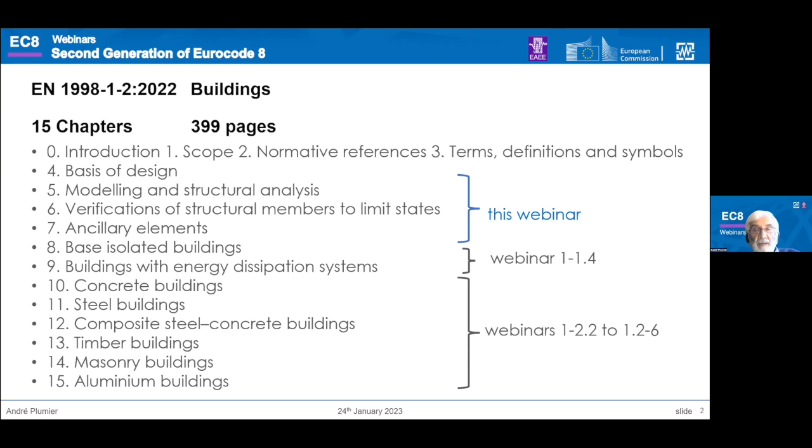Thank you, Mr. Chairman. My presentation is on the general parts of Eurocode 8, part 1.2, pointing out some new features present in chapters 4, 5, 6, 7 of this part. Part 1.2 has 15 chapters, a total of almost 400 pages, and the chapters on materials, 10 to 15, will be presented in the next webinars by the next presenters. This part also has 13 annexes, 7 normative and 6 informative, and most of these annexes are completely new or rewritten sections compared to the previous version of Eurocode 8.

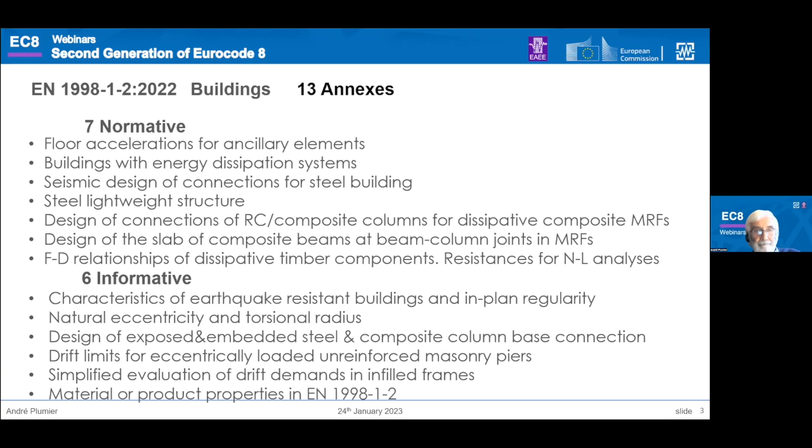In my presentation, the new features compared to Eurocode 8 of 2004 will be shown in blue color. This is a way to point out the new features, but I keep the usual data in black color, for the completeness of the presentation.

In the revised Eurocode 8, four limit states are envisaged: operational (OP), damage limitation (DL), significant damage (SD), and near collapse (NC). For buildings, the only mandatory verification is for the significant damage limit state. Of course, the national annex or the contract may ask for different things. For most structures, non-exceedance of the SD state avoids exceedance of near collapse under a more severe action, and damage limitation exceedance under a seismic action less severe than that of design.

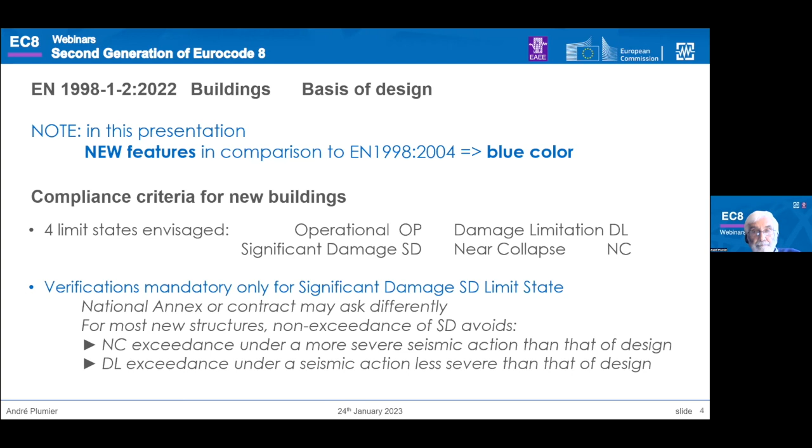In the revised Eurocode 8, there are, like in the previous one, three ductility classes: DC1, DC2, DC3, but their definition is partly different from the DCL, DCM, DCH of the current Eurocode. DC1 is very much the same as DCL, but the limits of application of DC1 are revised. I will explain that later.

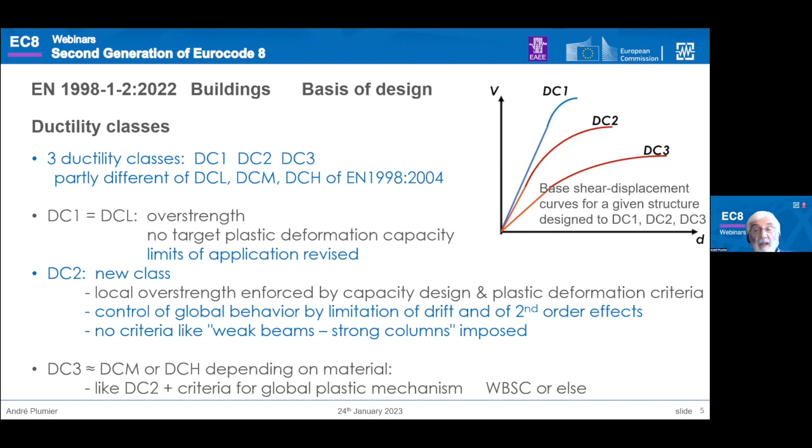DC2 is a new class in which local overstrength is enforced by capacity design and plastic deformation criteria, but the control of global behavior is by limitation of drift and second-order effects. There are thus in this DC2 no criteria like weak beam strong columns, which was imposed in DCM. DC3 is very much the same as former DCM or DCH, depending on the material. So it's like DC2 but with criteria for global plastic mechanism, like weak beam strong columns or else.

Regarding the reference seismic action, there was a complete explanation in webinar 1.1-2. But I mention that the reference seismic action is now the plateau of the spectrum, so the maximum 5% damped response spectral acceleration, the constant acceleration range. This is for a 475-year earthquake return period on site category A and consequence class CC2, defined in the table. So PGA, the former reference parameter, is S alpha 475 divided by FA, which is generally taken equal to 2.5.

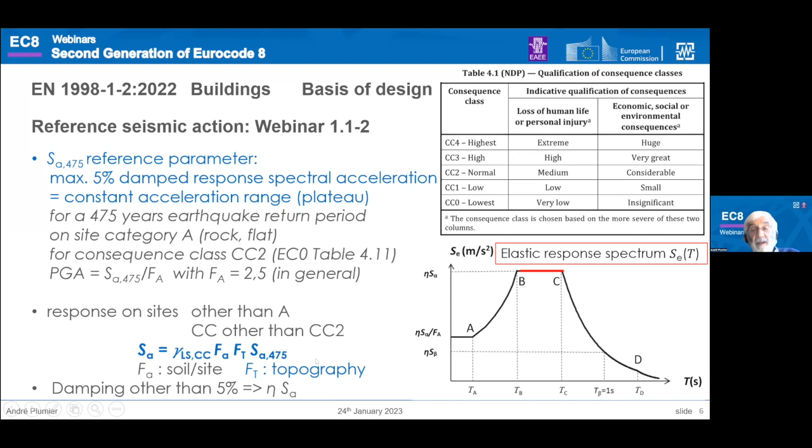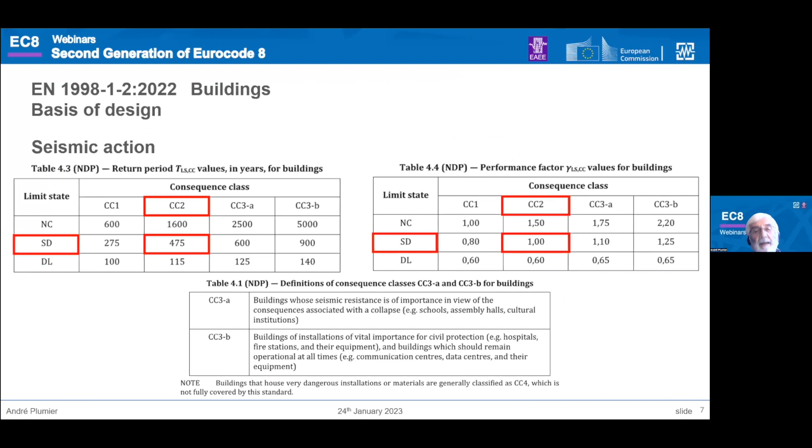Response on sites other than A, for consequence classes other than CC2, applies a complete formula in which you see factor FA for soil site, but also factor FT for topography, and the gamma limit state consequence class factor. For damping other than 5%, a factor eta is applied. These are data for your information; I will not speak about these tables, but this is just to make the slides complete for your use. A new parameter is also introduced, the seismic action index S delta, very much the same as the S alpha mentioned before.

S delta takes into account the influence of consequence class, and the other three factors, FA, FT, and S alpha, are as mentioned before. This S delta is used in many places in the code to define the seismic action class, so low, moderate, or high, and also to define limits of seismic action for given structural types per material and per ductility class.

There has been an evolution of this S delta from the current Eurocode of 2004 to the revised one. In 2004, in DCL, there was a recommended limit for all types of PGA of 1 meter per second square, corresponding to S delta equal to 2.5. But in the revised Eurocode 8, these limits are mandatory values of S delta. For instance, for non-ductile types, the value of 2.5 meter per second square is kept, but for other types it's significantly increased, up to 5 meter per second square for walls and metal structures.

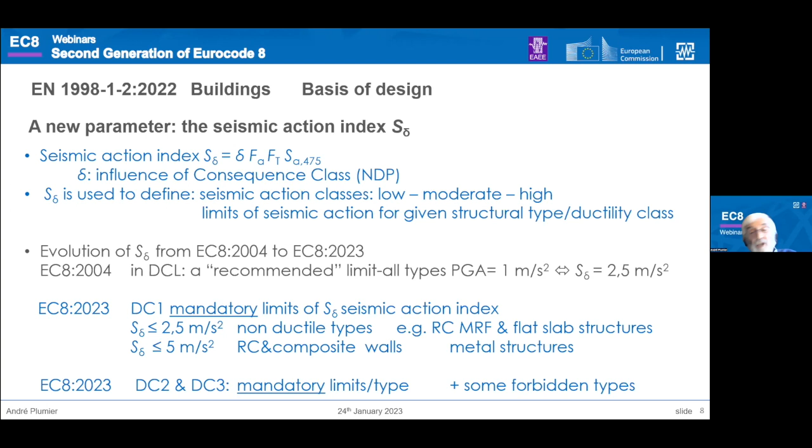In DC3 and DC2, there are mandatory limits which are given by chapter, as will be explained later.

In conceptual design, the classifications of structural types are extended in all chapters by materials, and besides the basic types, there is more distinction between different dual types and their relative contributions. There are new types like flat slabbed or steel lightweight, and also general clauses about hybrid structures in which two or more structural types and/or materials are present in the same resisting plane.

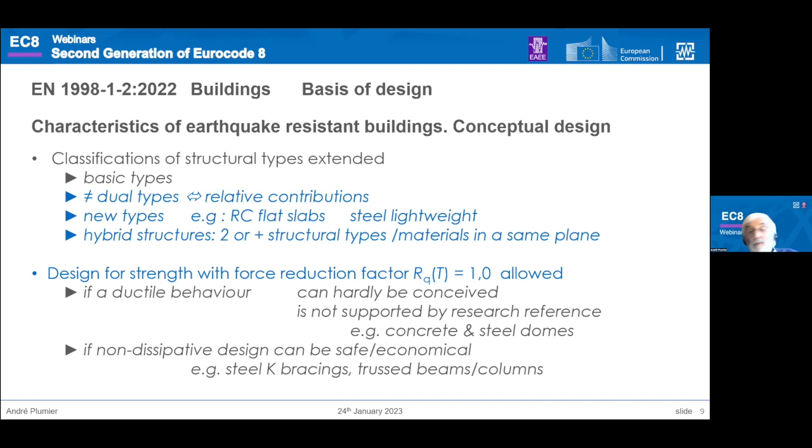Also, an important step forward is that the design for strength with force reduction factor, now named RQ of T, equal to 1, the so-called Q equal 1 clause, is allowed in particular if a ductile behavior can hardly be conceived for certain structures, for instance concrete or steel domes, and also if non-dissipative design can be safe and economical, for instance with steel K-bracing or truss beams and columns.

Concerning primary and secondary seismic members, the definitions are the same, but there is a new clause allowing a way to neglect or take into account the presence of secondary members. This applies if the contribution to lateral stiffness of all secondary members is smaller than or equal to 30% of that of all primary members. Then two analyses are performed, one only with the primary members, a second with primary and secondary, and the most unfavorable effects from the two are considered in the verifications. So the usual way, with a stiffness contribution less than 15%, is kept, but there is this new possibility.

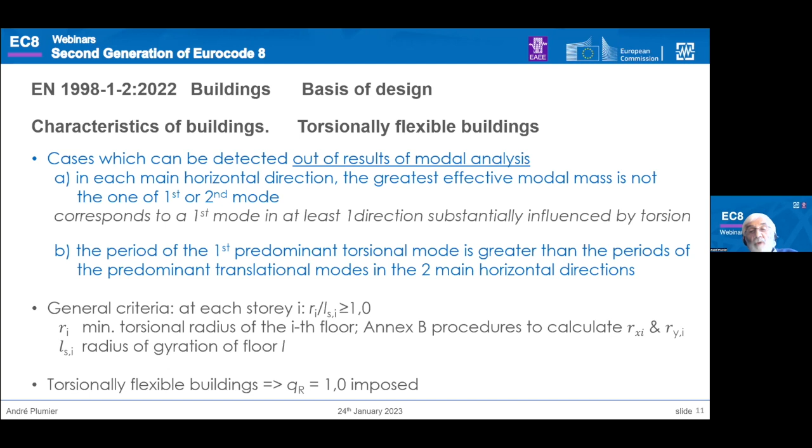Concerning the characteristics of buildings, new ways are introduced to qualify buildings as torsionally flexible, which can be detected directly out of results of modal analysis. This is the case if, in each main horizontal direction, the greatest effective modal mass is not that of the first or second mode, or alternatively if the period of the first predominant torsional mode is greater than the period of the predominant translational modes in the two main directions. This is a serious help for designers. Of course, the general criteria to qualify a building as torsionally flexible are kept and are similar to what exists in the current Eurocode.

Concerning structural regularity, for in-plan regularity there are no longer rules, only guidance, because it's considered that the analysis of the structure takes into account the in-plan irregularity, if any.

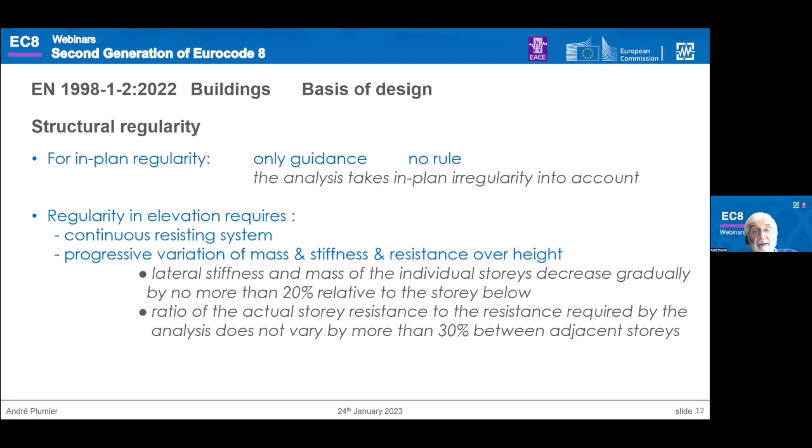Regularity in elevation requires a continuous resisting system and progressive variation of mass, stiffness, and resistance over height, with the numbers mentioned there. Being regular gives some advantage in certain verifications, as I will show later.

Concerning modeling, basically the things are the same, but there is a limitation to the use of two planar models in the modeling of a structure. This is allowed only for low-rise buildings: height less than 10 meters for 1-story high, and less than 15 meters for 2-story high. The way to consider cracking is kept the same, with 0.5 times the stiffness of the uncracked member, unless better estimates are justified.

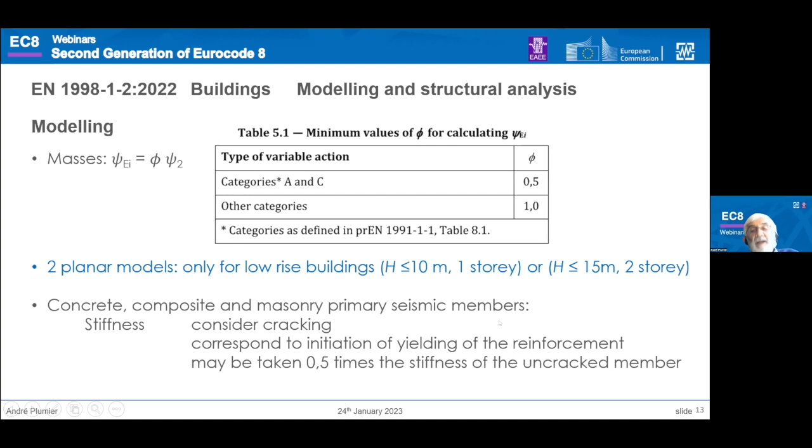Concerning eccentricity and torsion, there is a significant difference between the revised Eurocode 8 and the current one, in the way to take into account eccentricities. There are two eccentricities distinguished: one is the natural eccentricity, being the distance between gravity and torsional centers, and there is a minimum design eccentricity imposed.

In the force-based approach, the way to introduce moments about the vertical axis in the structure is to consider a certain eccentricity, but now it's the maximum between the natural one and the minimum design eccentricity. Also, the amplification factors which could be used to simplify things are now deleted, as they were very, very penalizing.

In 3D models, you have the same approach. The addition of the natural eccentricity and the minimum design eccentricity is no longer practiced; it's the same as in force-based analysis. There is a contribution of the natural and the minimum design eccentricity, but never the addition.

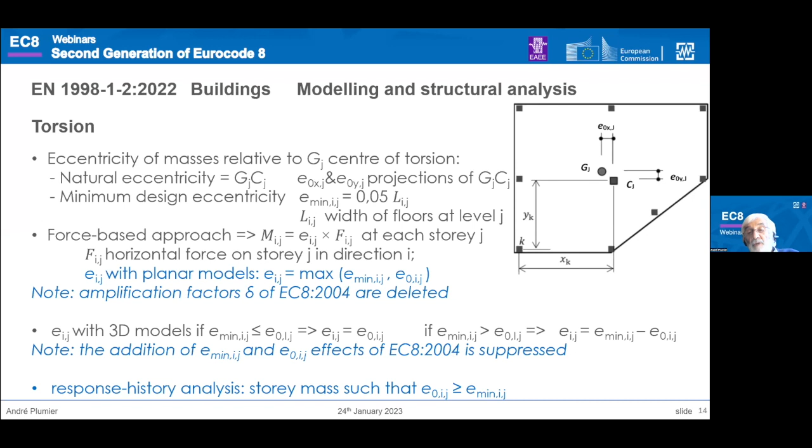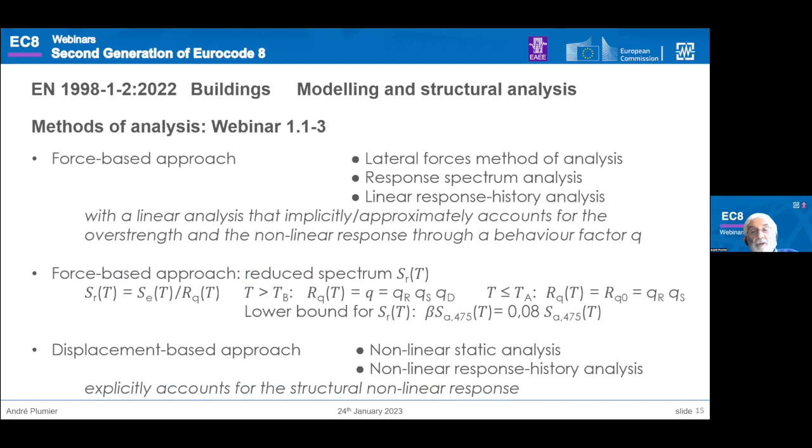Now, in response history analysis, story masses are such that the eccentricity is greater than the minimum defined by the codes. For modeling and structural analysis, this has been completely explained in webinar 1.1-3. So for force-based approach, nothing new, but there are sections of the revised code about displacement-based approach, as I will mention later in this speech.

Another thing I recall is that the behavior factor Q is now divided into 3 contributions: QR, the overstrength due to plastic redistribution of seismic action effect in the progressive yielding stage, so alpha U over alpha 1. QD expresses the capacity of deformation and energy dissipation under constant yielding of the structure. QS takes into account overstrength due to all other sources. So Q equals QR times QS times QD, and in the chapters by material, default values of Q, QR, and QD are given, which are upper bounds per material, structural type, and ductility class.

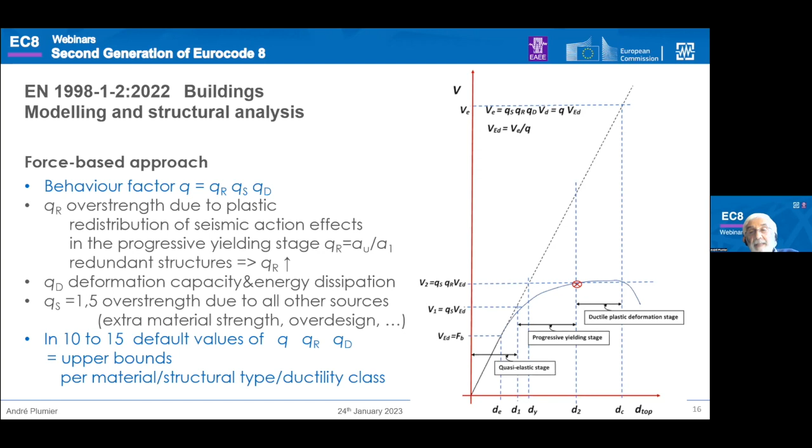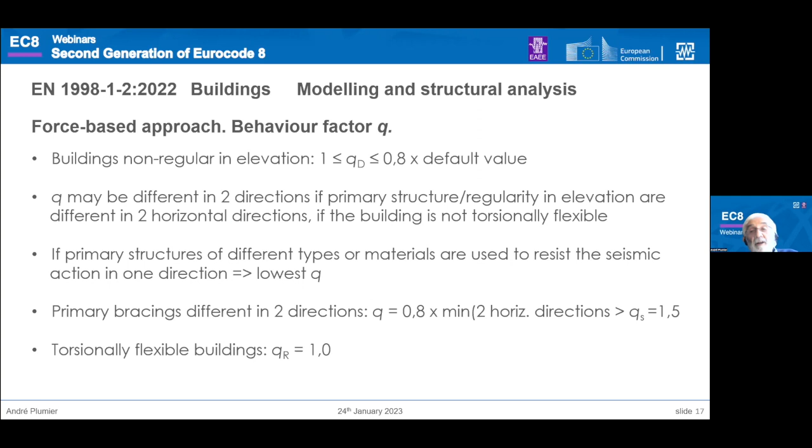Concerning the behavior factor you are allowed to use in the force-based approach, you have a certain number of clauses with reduction in case of non-regularity, what to do in case of 2 different systems in 2 different directions with different Q factors in 2 directions, etc. So these rules are basically the same as in the current Eurocode.

The lateral force method of analysis is now forbidden for structures of high elevation, so higher than 30 meters, or with the first period of the first mode greater than the minimum of 4 TC, TC being a corner period of the earthquake response spectrum design, or 1.5 seconds.

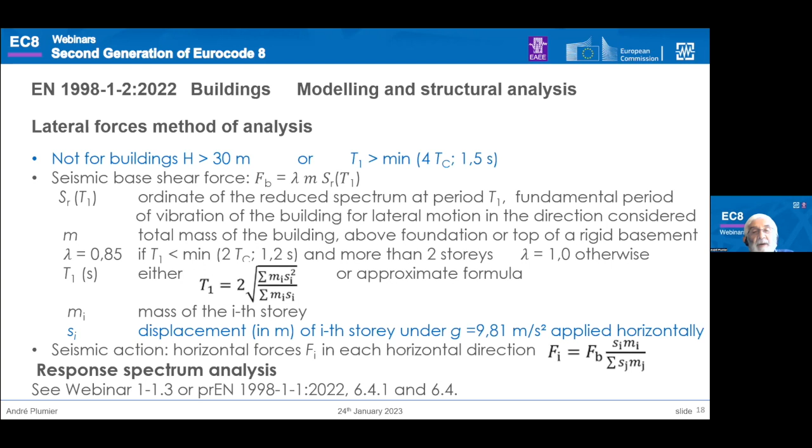Response spectrum analysis was explained in a previous webinar, I do not insist on it. Concerning nonlinear static analysis, again this was explained in detail before. I just mention that in the case of low-rise wall buildings, if the bending moment effects in walls are low in comparison to shear action effects, each story may be analyzed independently.

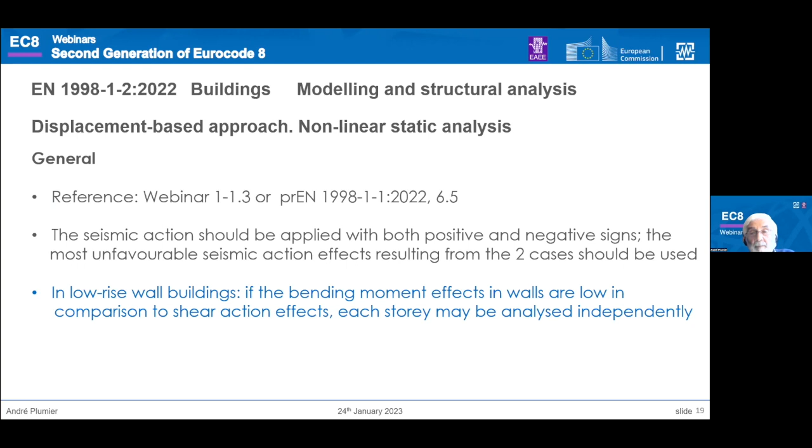The revised code provides in this part 1.2, like in part 1.1 and the other parts, data for the practical usage of nonlinear analysis. For nonlinear static analysis, all these clauses in blue are given to allow the construction of the capacity curve. So I will not give details on this.

This is the way to calculate the normalized lateral force and the way to apply it to the structure, and where to apply it, and where to check the control displacement of the structure.

Correction factors are given, which are ratios between normalized deformations obtained from linear elastic analysis and from pushover analysis. They have variations, one in plan, one in elevation of the building, and they primarily account for torsional effect and higher mode effect in elevation.

For response history analysis, I suggest you go back to webinar 1-1.3 or to the revised Eurocode 8 itself.

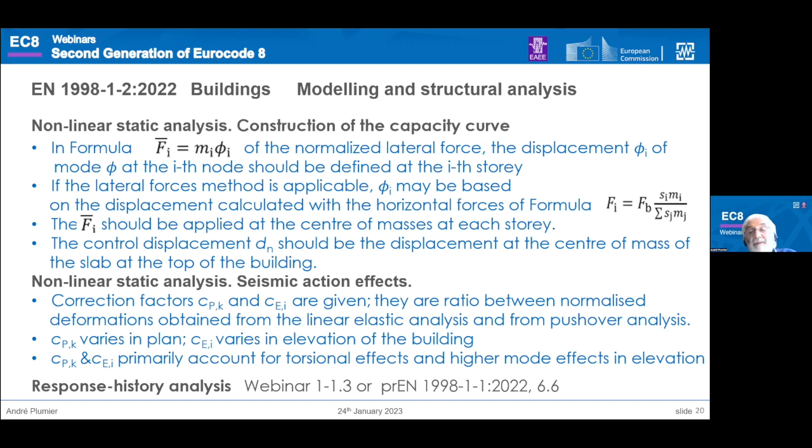Verification at the significant damage limit state in the force-based approach. Some basic verifications are exactly identical to what exists in the current Eurocode. Equilibrium: the building should be stable, including against overturning or sliding. Action effect should be smaller or equal to strength, or strength should be greater.

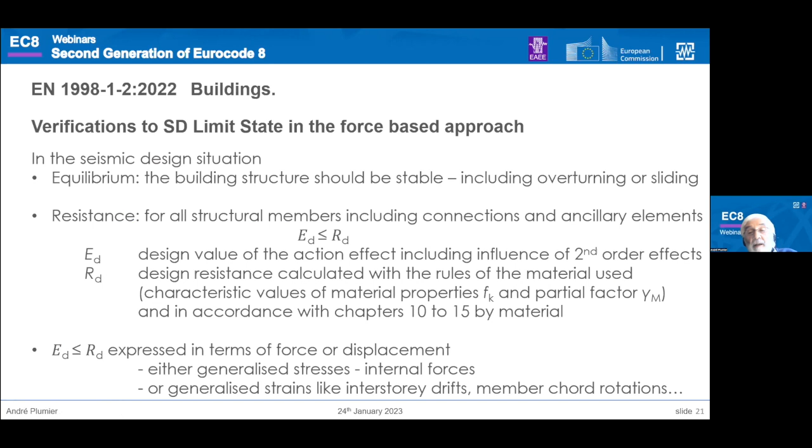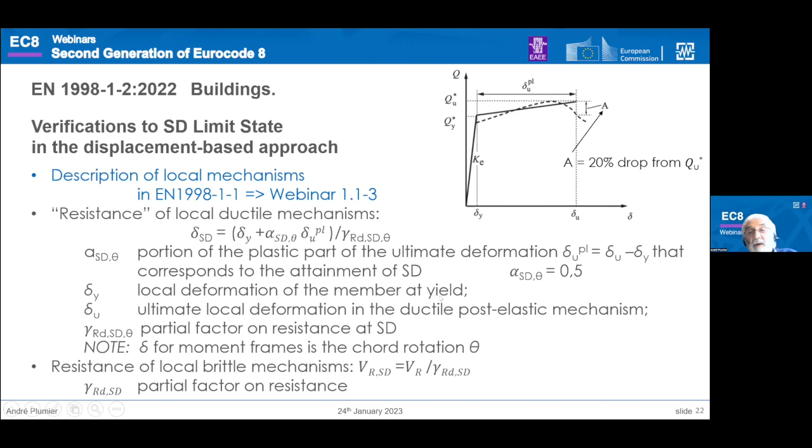This can be expressed in terms of force, but also in terms of displacement, so generalized strains, interstory drift, member chord rotation. For the data on chord rotation, you can go back to part 1.1, where you will find graphs of this nature for every type of material. There is a description of the local mechanism given, and the current data are summarized in this slide, but I do not insist, not to duplicate what is explained in these webinars.

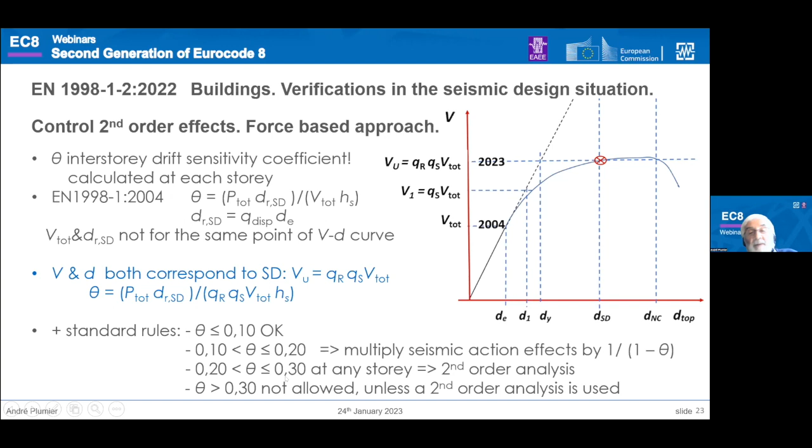Now for the checks related to theta, the battery of formulations is kept: if theta is smaller than 0.1, it's okay. Between 0.1 and 0.2, you have to multiply the seismic action effect by 1 divided by 1 minus theta. Second order analysis applies if theta is between 0.2 and 0.3, and it's not allowed above 0.3.

In the displacement-based approach, which is new in this code compared to the current Eurocode, there is no problem with the formulations of theta because this is the first time such an expression appears. The code expresses limits of interstory drift at the SD limit state.

This differs from the past, when it was expressed at the DL limit state. So there is a general expression stating that the relative interstory drift should be smaller than lambda s times hs, where hs is the story height.

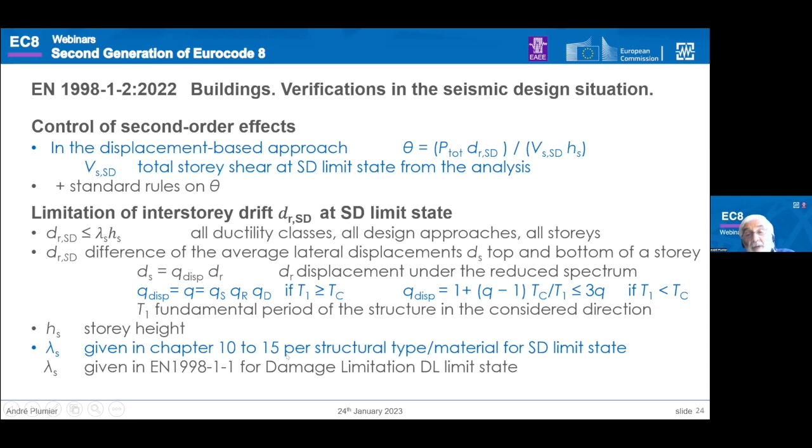The difference is that there is no need to calculate action effects at the damage limitation limit state in addition to the SD limit state. The limitations of interstory drift are tuned to fit the SD limit state with the expressions given here. The lambda values are provided in chapter 10 to 15, per building structural type and material.

Capacity design in DC2: as mentioned before, there is no longer application of the global plastic mechanism criteria like weak beam strong column. Prevention of soft story is instead realized by limitation of drift and of second order effects, and for some types of structure no further verification is required beyond complying with these limitations.

This is the case for concrete wall systems, concrete wall equivalent dual systems, or dual systems with concrete, steel, or composite structure. For moment resisting frames and moment resisting frame equivalents, if they are regular in elevation and respect the limits of theta and interstory drift, no further verification is required beyond these limitations.

Now, in DC3, where you get the advantage of a higher behavior factor, the verifications required are similar to those of DCH in the current Eurocode.

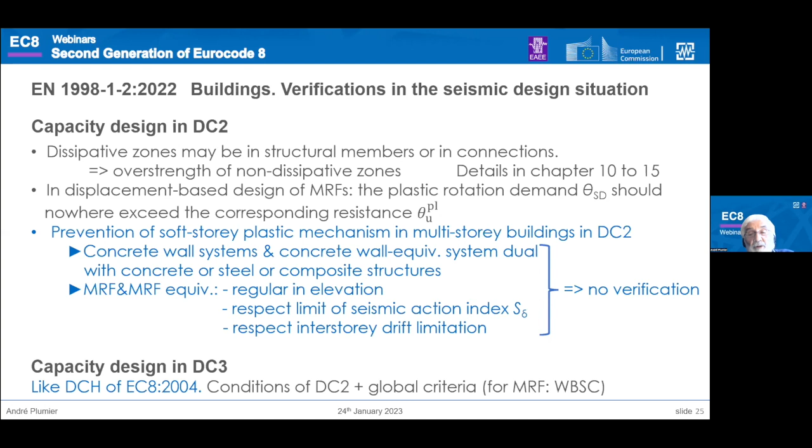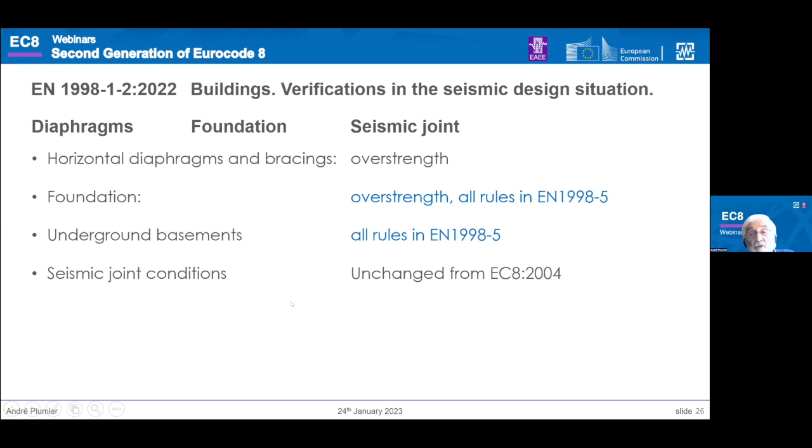Concerning horizontal diaphragms and horizontal bracings, there is a clause requiring overstrength for this part of the structure. Same with foundations and data for foundations and underground basements — these are no longer present in part 1-2, having been moved to part 5 of the revised Eurocode. The conditions on seismic joints are unchanged compared to EC8 from 2004.

The global mechanism is obtained under VU, which is qR times V1, so that the real axial force in columns at SD is greater than the calculated NEd under V1. This is why there is a need to introduce an amplification factor omega.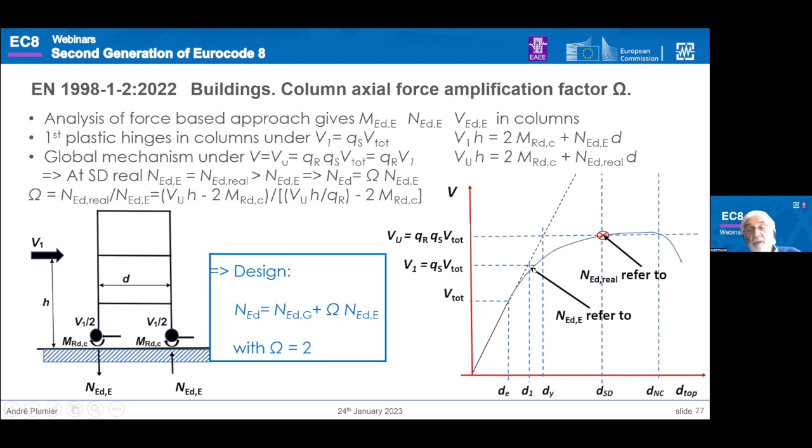This means the seismic action effect is amplified by a factor of 2 compared to what is present in the current Eurocode. This can be seen here: NEd refers to this point on the force-displacement curve, whereas the real NEd is here, because NEd keeps increasing to resist the overturning moment in the structure after the stage at which NEd is reached.

The code has introduced, at the request of CEN, more explicit clauses about force transfer zones in DC2 and DC3. These are zones where vertical components of the primary structure are interrupted for open spaces, car parks, or setbacks.

They should be designed with overstrength using this expression, which amplifies the effects of all actions calculated in the transfer zone, with omega d being the ratio of resistance to action effects in the dissipative zone above the transfer zone, combined with an amplification factor of 1.25.

The model for such a transfer zone requires a 3D model in which the structural members of the transfer zone are made explicit, and the analysis should be at least response spectrum analysis, though it can also be 3D nonlinear.

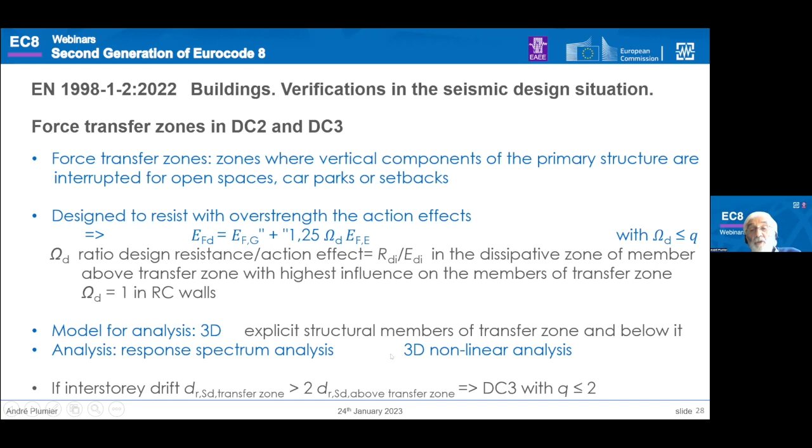It is mentioned in the code, possibilities to realize strength of these transfer zones. Three possibilities are mentioned, all gathered in this drawing, where you have the transfer zone at this place. It can be realized by a diaphragm at the level of interruption plus a beam in the plane of the wall, plus support by columns in the same plane, by a couple of horizontal forces in two diaphragms, or by a column in the plane of an interrupted wall. So it's a case which mixes different possible interactions.

Behind this is the need to have an idea of which plastic mechanism is aimed at SD. There is no application of weak beam, strong column in the transfer zone, because this one is designed to remain elastic.

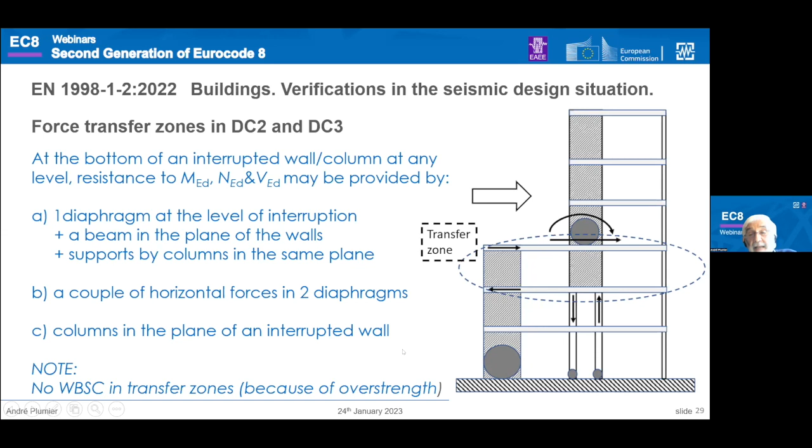There is also in the code a huge section, 13 pages, about ancillary elements. There is already something in the current Eurocode. There is an explanation on how to calculate the seismic action effects on these ancillary elements using this expression of FAP.

Now the main modification is about SAP, which was given by a simplified formula in the current Eurocode. SAP, in general terms, is the value in the floor acceleration spectrum for the period T of the ancillary element, and ξap is the damping of the ancillary.

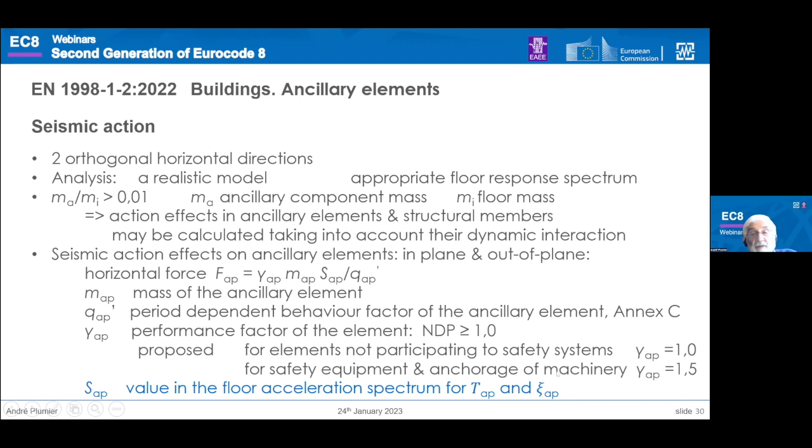Different ways are open to calculate this SAP. If floor spectra are available, you read the value of SAP at the given floor on these spectra. If they are not available, there is a more complex, more complete and improved formulation to calculate this SAP given by this formulation. So all details are given to calculate this expression, which is a serious improvement compared to the current Eurocode.

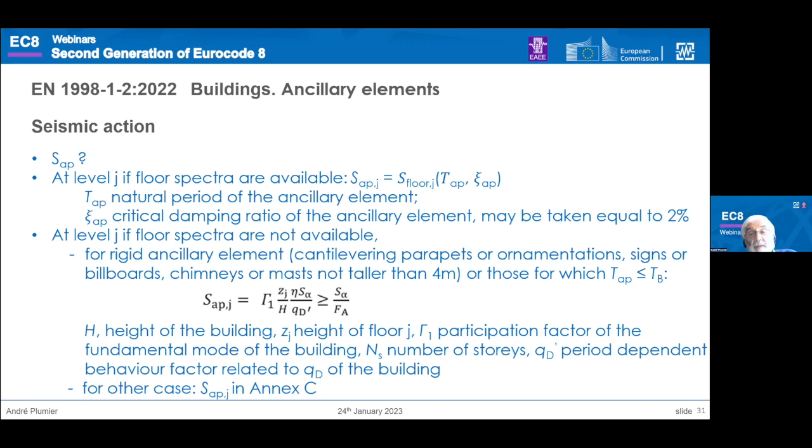This applies for rigid ancillary elements. If not rigid, and a criteria to qualify this rigidity is given, SAP can be calculated according to a method given in Annex C.

The design of frames with interacting masonry infills is subject to other limitations of drift than those strictly applied to the frame. They depend on the masonry infill type, following the table shown here. If there are openings, the limits are reduced. If there is confinement or reinforcement, they are increased by the factors given here.

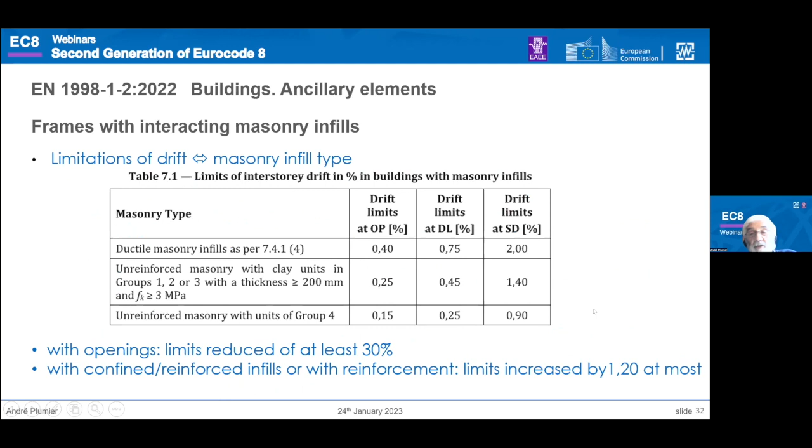The analysis of frames with infill may be made in different ways. One way is with a model of the bare frame only, and this applies if the distribution of infills is quite regular. For this reason, a horizontal regularity parameter has been introduced, which takes into account the symmetric character or not of the infills present in the structure and their distance to the axis of the structure, for both X and Y directions.

Now if the building is regular enough, simplifications are possible. But if it is irregular, the infills have to be modeled explicitly. Concerning vertical irregularity, the method present in the current Eurocode is kept, with this factor KIR given, which you know.

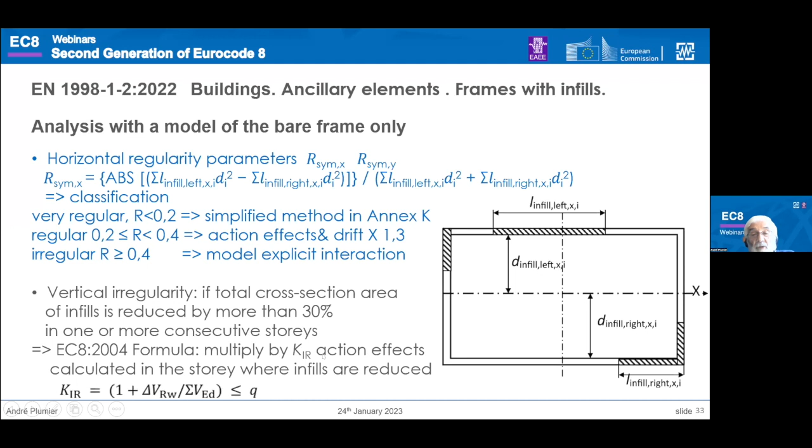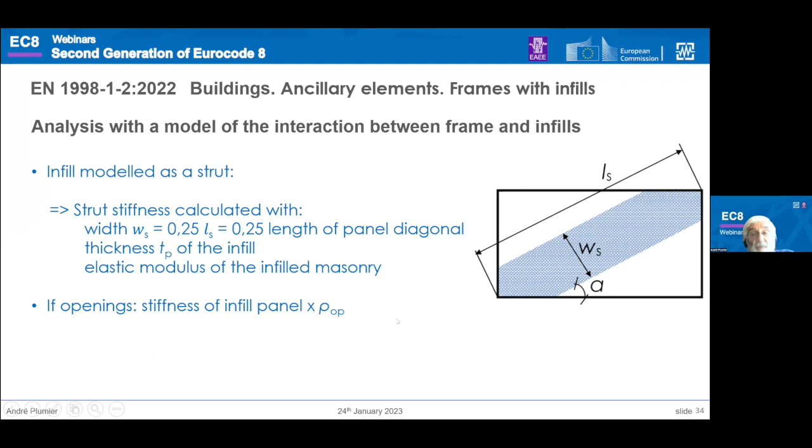Concerning the explicit modeling, infill may be modeled as struts, and there are values given in the code concerning the way to calculate the strut stiffness, the width of the struts, their thickness, and their modulus. If there are openings, there is a factor which can be calculated, which I will show later.

Explicit requirements concerning the verification of columns adjacent to infills are given. They are partly based on the length of columns over which the diagonal strut force is applied, which results from the definition of the struts I just showed before. For the rest, the clauses are similar to what they were in the current Eurocode.

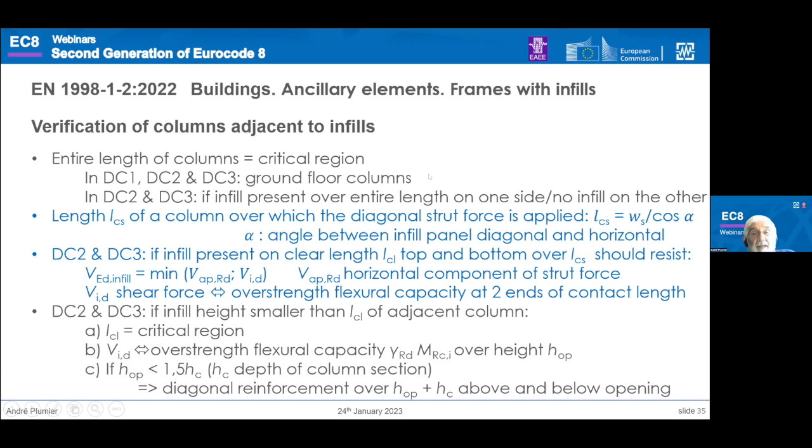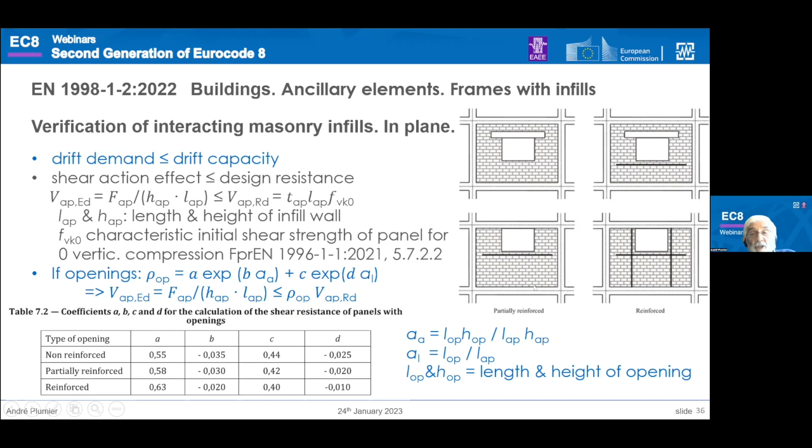If there are openings, there is an expression to calculate the factor rho OP, which takes into account the geometry of the infill and of the opening, and all the values used are given in the table shown here.

For the verification out of plane, the lateral action is calculated based on the same FAP value, with this expression. Resistance may consider flexural or arching effect resistance as calculated according to Eurocode 6.

But the condition is that the action effect should be smaller or equal to 0.5 times the flexural or arching resistance of Eurocode 6, and this 0.5 is a rough way to take into account the interaction between in-plane and out-of-plane action effects. Conditions are also given concerning the connection of infills to the bounding frame.

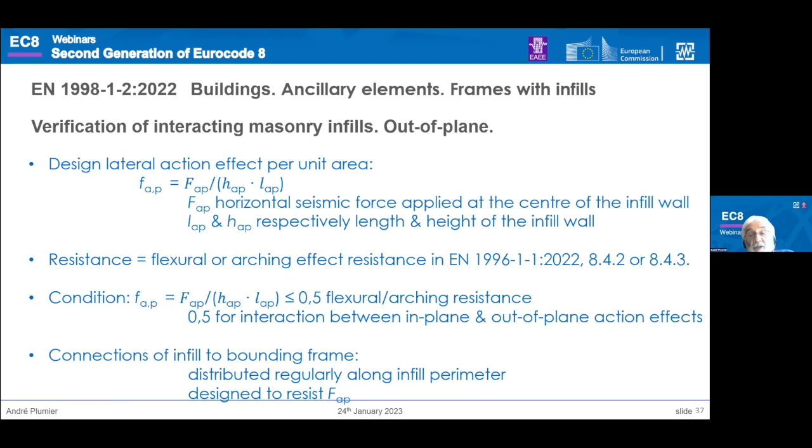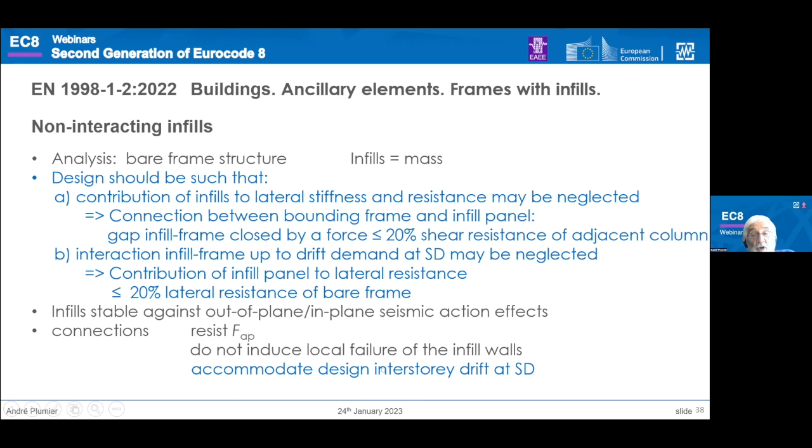For non-interacting infills, explicit conditions are given to allow limiting the contribution of infill to lateral stiffness and to limit the interaction between infill and frame up to a drift demand at SD. The connections should accommodate the design interstory drift at SD.

The code also includes explicit requirements for structures with claddings. They concern in particular their connection, which can be of the isostatic type or of the integrated type, meaning they contribute in such case as interacting claddings. Clauses also bear on connection of these integrated panels.

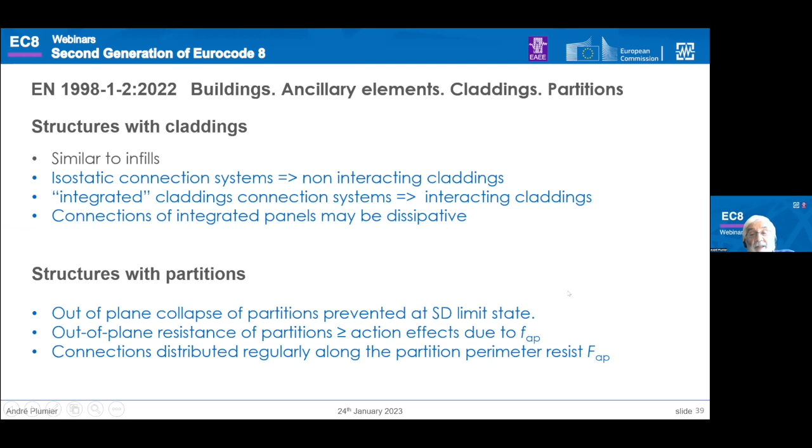Similar developments are made for partitions, where requirements are explicitly given in the code.